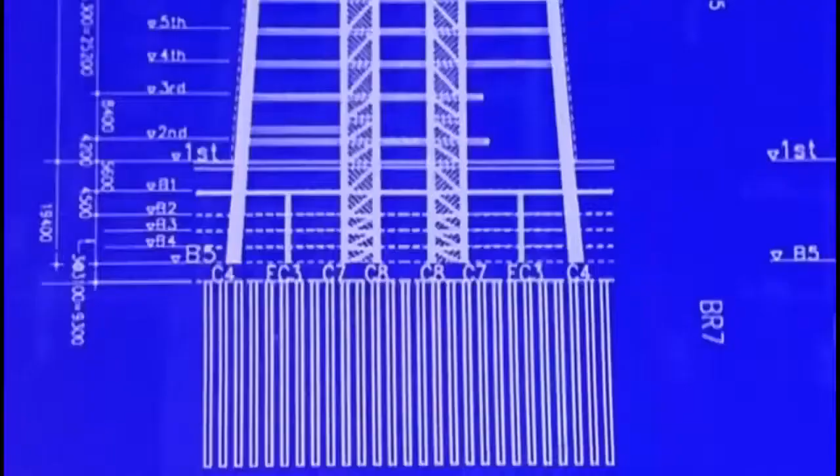Taipei 101, the world's tallest skyscraper. 508 meters of the most high-tech engineering and construction on the planet. Mixing ancient values with cutting-edge technology and taking the heart of Taiwan into the future.

Designing and building the world's tallest skyscraper is no easy task. But here in Taipei, two of the most powerful forces of nature, earthquakes and typhoons, combine to make going super tall a super challenge. I mean, any tall building in the world is a feat of engineering.

Using world-leading engineering and construction techniques, Taipei 101 not so much conquers nature, but outsmarts it. This is the only super tall building in the world that's designed in a seismically active zone. This has never been done before, certainly not to this scale.

The result is a man-made marvel, a unique megastructure of unprecedented size, shape and technology, built to withstand the very worst that nature can dish out. I, for one, I'm a structural engineer. If there's going to be an earthquake in Taipei, I want to be in this building. I'll choose this above all else.

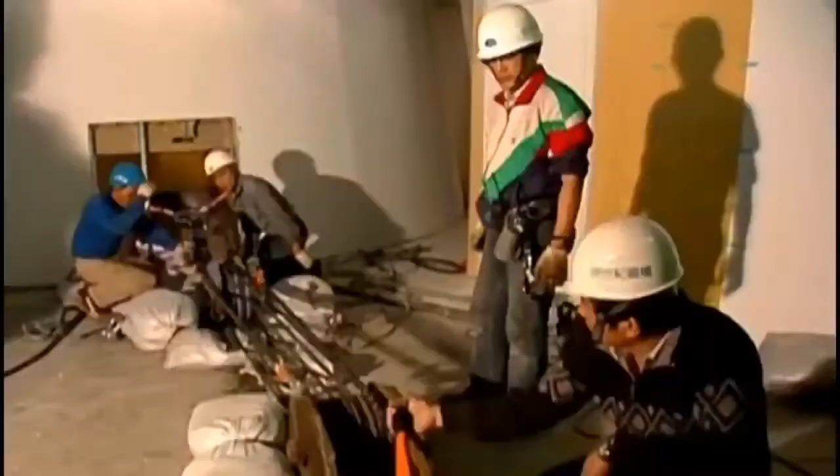For as long as humans have been making buildings, those buildings have been getting taller. From the Empire State Building in 1931, Sears Tower in 1974, Central Plaza Hong Kong in 1992, to the recent Petronas Towers in Kuala Lumpur. Skyscrapers are buildings that go beyond functionality. They are symbols of prosperity and power, icons of wealth and industrial might.

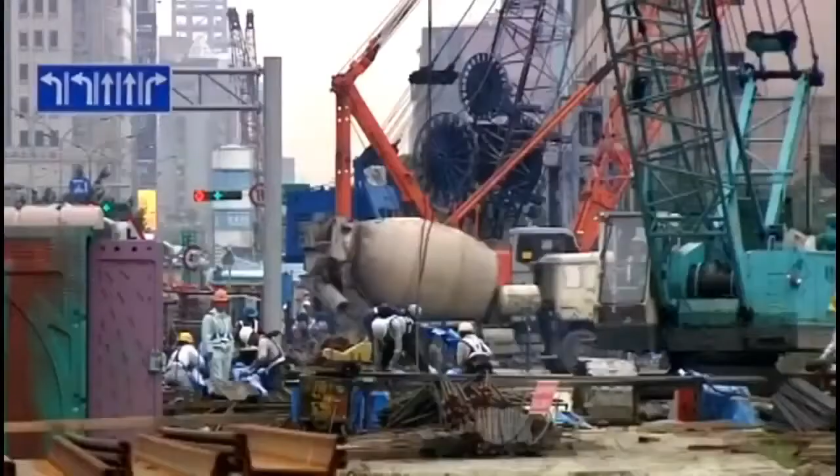If you're looking at the history of skyscrapers, really you begin in America, Chicago and New York are the classic cases. But in the last, let's say, 10, 15 years, Asia's really boomed with regards to the building of large structures. In recent years, Asia has seen an explosion of mega-scale building and industry. The region now holds 8 of the world's 10 tallest buildings. And as modern construction methods and materials continue to improve, designers will continue to aim ever higher. Not because they have to, but because they can.

Developer Harris Lin is one of the most powerful and successful businessmen in all of Taiwan. A member of a major construction dynasty, for him, Taipei 101 is the result of a lifelong ambition. Since I was a boy, I have dreamt that one day I would build a great building, one which will benefit later generations for a very long time. For Harris Lin, Taipei 101 is more than just a building. It's a statement on Taiwan, its people, and its future.

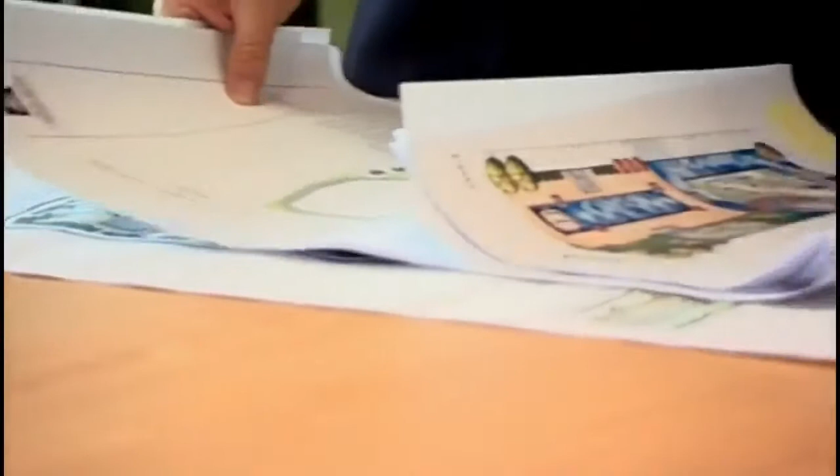A notice to the rest of the world that Taiwan has the technology, the industry, and the determination not just to join the giants of global industry, but to lead them. There's no better way, really, of getting global attention than building these super tall buildings, particularly if it's the highest in the world. Initially earmarked as the centerpiece for the growing and glitzy Xinyi district known as Taipei's Manhattan, the primary goal for the building is to be the best, but not necessarily the tallest.

Long-standing friend of Harris, architect C.P. Wang from C.Y. Lee & Partners, comes into the project in the early stages. We started with 3 buildings, a 60-story building in the center and 2 smaller buildings that are about 20 stories for the different shareholders. But plans quickly evolve as key investors clamor to have the building push up, not out. The planned 60 stories soon turns into 88. And with the mantle of the world's tallest a mere 13 floors away, the momentum becomes unstoppable.

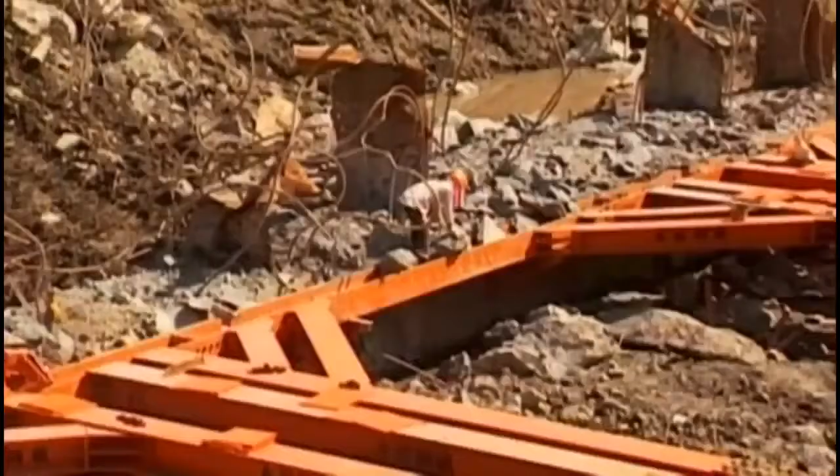We truly believed we could do it. That if we worked hard, we could make a building that was visible to the entire world. But three factors combine to make this project not only the tallest and most visible in the world, but also one of the most difficult to build. Taipei City is an inhospitable place to build a skyscraper. Beneath the earth, a thick layer of soft clay demands uniquely designed foundations. While above ground, the threat of earthquakes and typhoons requires a level of engineering and construction never before achieved.

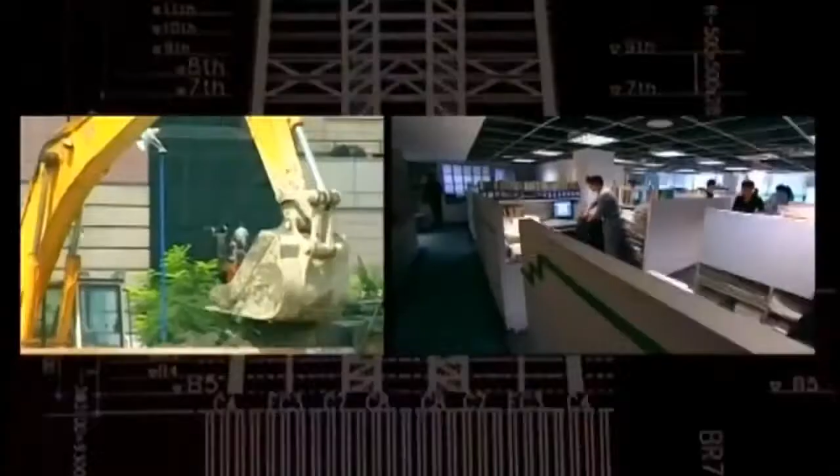If Harris Lin wants to make the tallest building in the world here, his engineers and builders will have to confront the power of the earth. Designing a structure flexible enough to resist an earthquake, but stiff enough to resist a typhoon. Contradictory requirements that until now have never been combined. All these different mixtures of elements have to be blended almost superbly in order to make the building achievable.

The solution will combine two revolutionary systems. First, a braced megaframe joined to 8 super columns filled with a mixture of steel and concrete. And a tuned mass damper, a giant pendulum, the weight of 10,000 people, designed to oppose the effect of wind. The combination of these two concepts is groundbreaking. I am very proud of it, and as architect, you don't get a lot of opportunity to work on something of this magnitude.

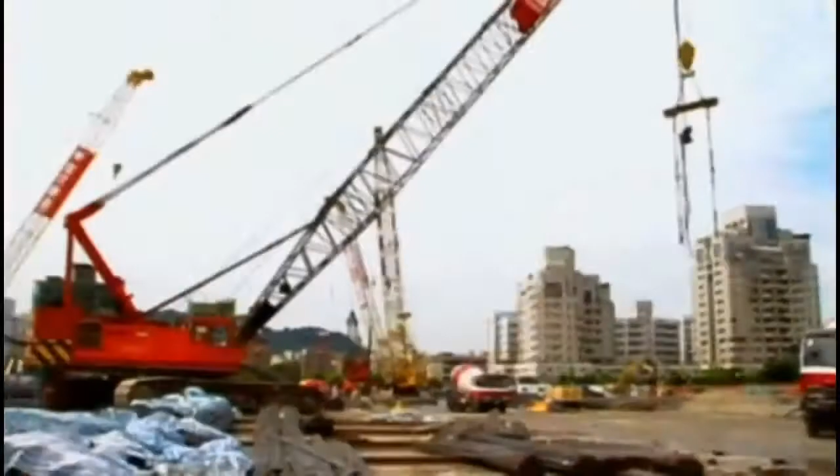Construction will take 6 years, 2,000 workers at any one time, and 700,000 tons of the most advanced steel and concrete ever made. These cost more than the national GDP of some countries. Yet despite all the investment, ingenuity, and determination of humankind, the forces of nature can strike at any time, whether you're ready or not.

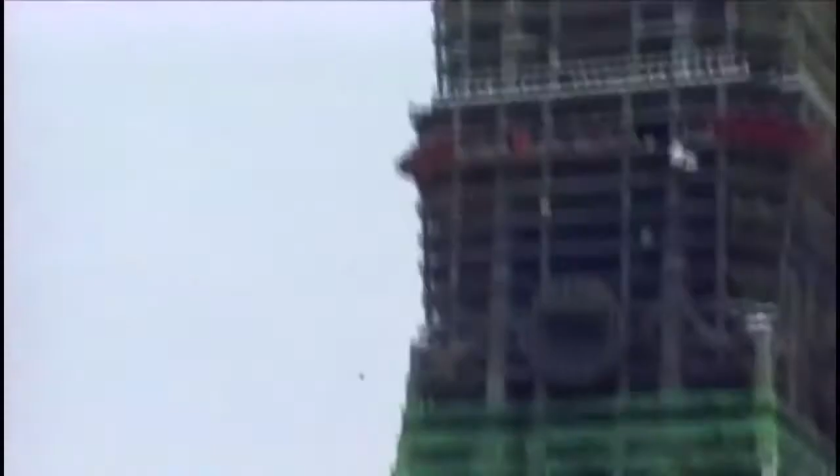Taipei 101 will be built to withstand earthquakes and typhoons, but it also needs to withstand the test of time. To be a true landmark, it must look unique. Its appearance mixes traditional Chinese icons: bamboo for strength and resilience, a pagoda for serenity, the perfect form of an open flower, and the luck and prosperity associated with the number 8.

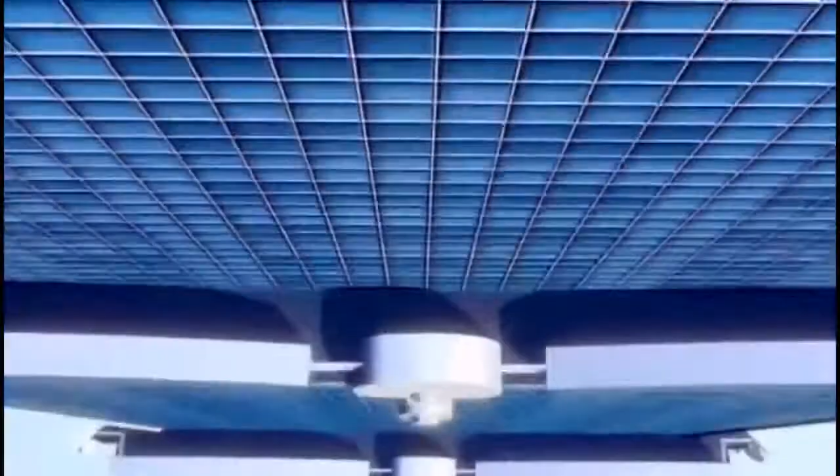We tried very hard to do something that we hope can represent the city, the island, as well as our culture. The result is this: 508 meters tall, 101 floors from ground level. A building that looks completely unique, but soon proves challenging to build. Every major skyscraper in the world is a trade-off between what will look good and what will stand up. For a tall building this height, you cannot escape the practical matters. It has to work.

Taipei 101 will be the tallest skyscraper on Earth. And the forces on a building of this scale are truly immense. Gravity forces it down, while wind pushes it sideways. Existence is a tenuous balance between being strong enough to stay up, but not so heavy as to cause collapse. Most skyscrapers have exterior walls that are either straight up and down or sloping in. But Taipei 101's unique shape sees much of its exterior surface sloping out.

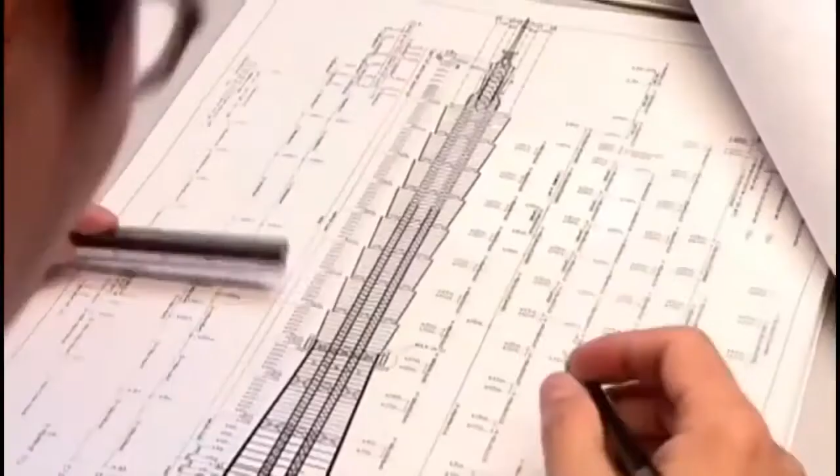Here at Evergreen Consulting, engineer Shaw Shi oversees plans that will translate Taipei 101's unique exterior into one of the strongest, lightest, and most resilient interiors ever made. The shape of Taipei 101 is more complicated than regular tall buildings, because simple and straight lines will be easier to work with.

Aesthetically, Taipei 101 is broken into sections resembling a stem of bamboo. But similarities with this fast-growing superplant don't end here. Just like bamboo, the distinct structural sections of 101 strengthen and support the whole building. Each section operates as an independent unit, transferring the building's massive weight away from the outside of the building and into the middle. The result is a stronger, lighter, and more flexible tower.

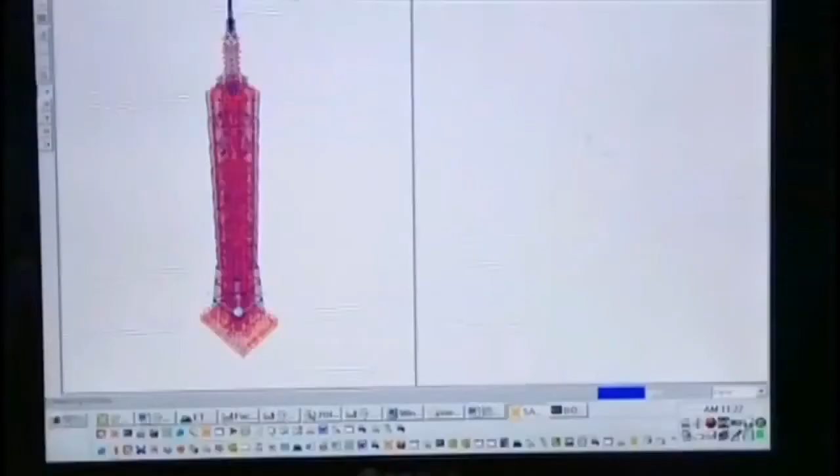For CP Wang, this sort of lateral problem solving has been integral to the success of the project. Their aim is not just to be the highest, but to be their innovative best. Let me put it this way, it's not like the Wright brothers when they invented the airplane. Today a lot of people know how to build an airplane, but it's how good it is that matters. The design of Taipei 101 requires unique engineering to facilitate a unique shape. But the next challenge facing designers pushes this engineering to the limit.

How to make the tallest building in the world stand up against two of the mightiest forces of nature in one of the most hazard-prone cities on Earth. Every year, the people and buildings of Taipei are under attack from two of nature's most primal and unstoppable phenomena. When you put a tall building on an old secondary earthquake fault line, which runs nearby here, and in a place where you get significant typhoons, that just has major challenges.

The problem is that to resist wind, a building must be stiff. But to survive an earthquake, it must be flexible. Taipei 101 will have to be both. This is the only super tall building in the world that's designed in a seismically active zone. This is really pushing engineering and construction boundaries right to the limit.

The island of Taiwan sits at the junction of two tectonic plates, where vast plates of the Earth's crust grind together, causing earthquakes. The entire island is unstable. Three smaller faults run directly under Taipei itself, causing hundreds of earthquakes every year.

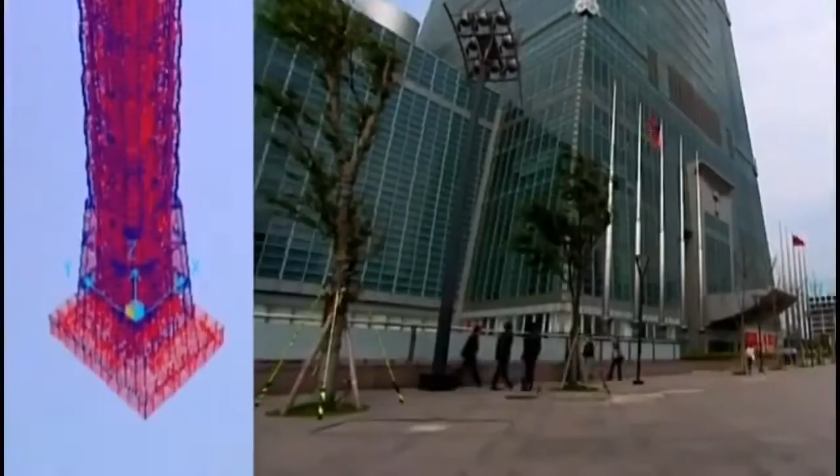The effect of an earthquake on a giant skyscraper can be catastrophic. The entire building is shaken to its foundation as intense waves of energy from the Earth are transferred to every inch of the building structure. To withstand these shocks, the building needs to be flexible so it can move with a quake and not against it. If it's too stiff or brittle, it can break.

Superficial damage like broken windows or walls can be repaired. But any damage to the internal steel framework of a building can be a disaster. As the tallest building in the world, Taipei 101 must be engineered to withstand major earthquakes. But just how major is something of a mystery.

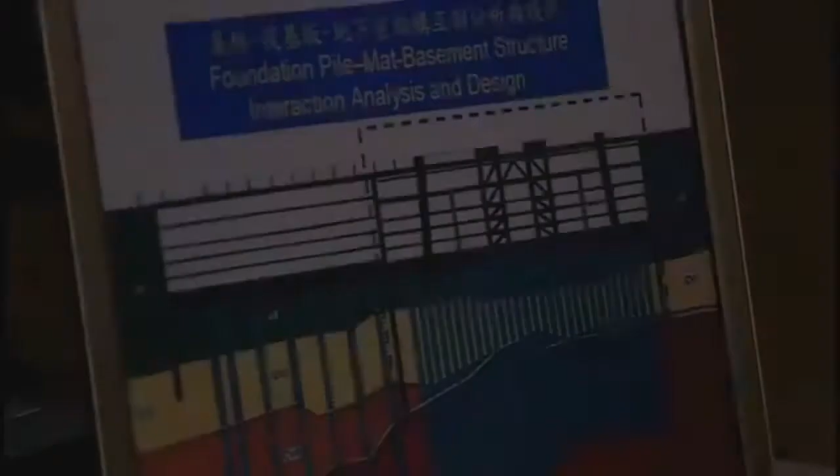Geologist Dunstan Chen is one of the scientists charged with finding out the details. This is when we make the first design, okay? We have to consider this fault. We know there's a fault somewhere here, but we don't know exactly where it is. An investigation is launched involving some of Taiwan's leading geologists to find out where the fault is and how far it is from the Taipei 101 site. They need to establish if it's active and how they should deal with it.

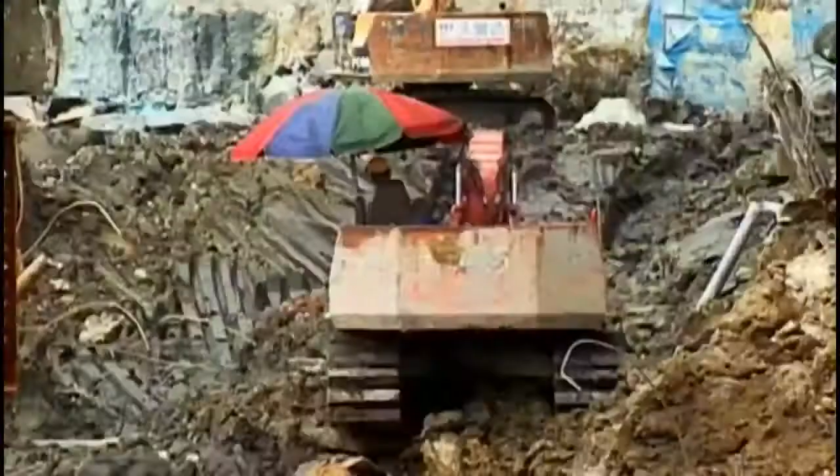The results shock everyone. Then we drill number 4. Okay, we encountered the fault. And this fault, actually, the gouge was around 10 meters thick. It's a huge one. In most earthquakes, the closer the building is to a fault, the worse the impact. The fault found by Dunstan and his colleagues is not only huge, it's close. Only 200 meters away from the 101 construction site. 101 must be prepared to face the most extreme earthquake shocks imaginable.

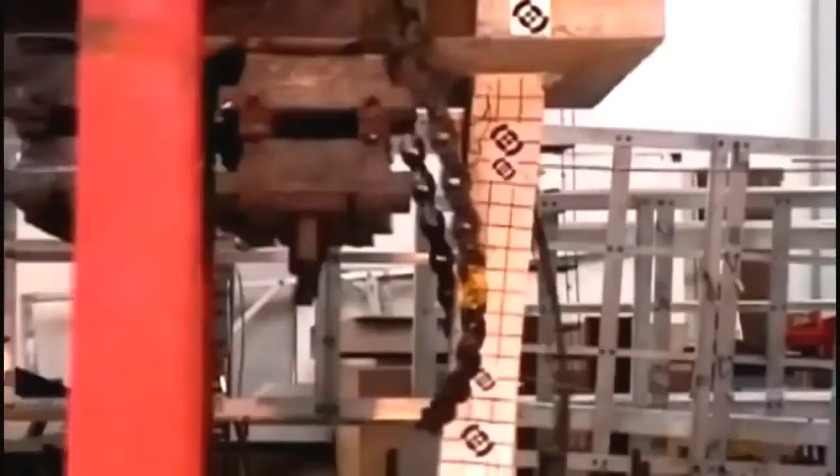Here at the NCREE facility, scientists use a multi-dimensional shake table to simulate a variety of different earthquake scenarios. Scale models of different structural configurations are tested, and the information gained helps to design buildings that are better able to withstand the devastating impact of earthquakes. An earthquake shock delivers brutal vertical, horizontal, and twisting strain on a building. Every joint of every structural element is strained, and if there is one weak link, the whole lot can go.

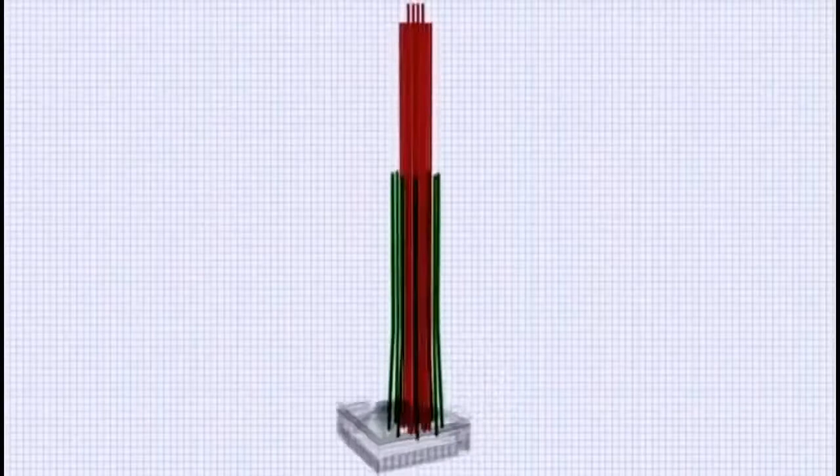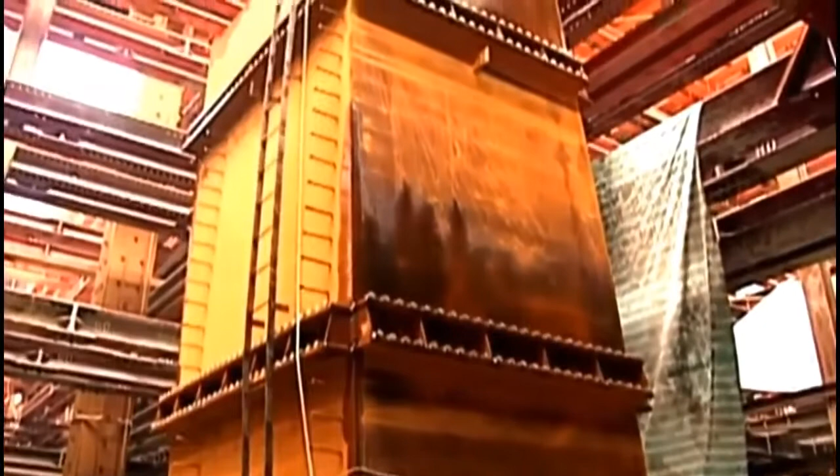To keep 101 standing in a major earthquake, engineers develop a complex internal megastructure. The central core of the building is connected to 8 incredibly strong supercolumns by a network of horizontal outrigger trusses. The supercolumns act like a giant flexible spine, enabling the building to flex and move if it needs to, but not break. Although the idea of supercolumns has been used in other buildings before, the size of 101 takes this engineering to an entirely new level. But the threat of earthquakes isn't the only natural force that builders of Taipei 101 have to worry about.

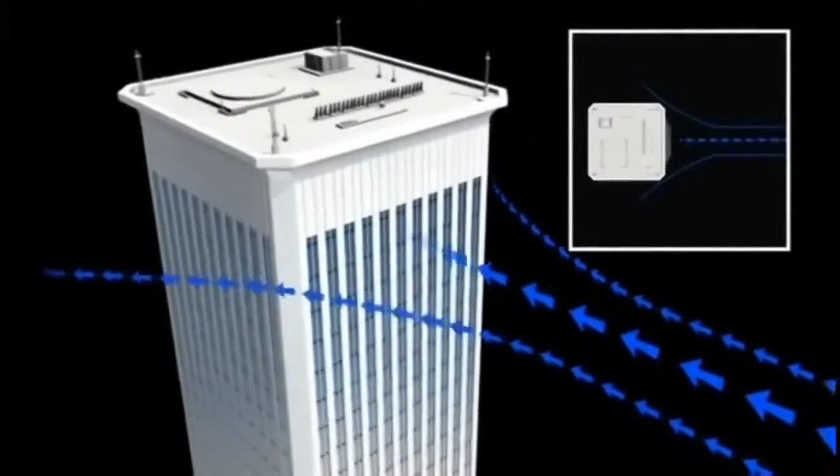Every summer, unstable equatorial air off the coast of Taiwan generates vicious typhoons that lash Taipei. These intense tropical storms, with winds of up to 200 kilometers per hour, can literally blow a building to pieces. But it's not just strong winds that designers of 101 have to worry about. The surface area of a skyscraper is so huge that even a small breeze can still have a major effect. As wind hits a building, it impacts in 2 ways. First, the exposed face of a building can be pushed by the wind like a giant invisible hand.

But under certain conditions, the wind can generate pulsing vortexes on opposing sides of the structure. The vortexes begin to oscillate, exerting small but consistent pushes on alternating sides of the building, eventually causing it to sway. Like a child pumping their legs on a swing, each gust of wind adds energy. This swaying can be so severe that occupants of high-rise buildings can experience motion sickness. Normally, engineers can accommodate this problem by making the internal structure of a building stiff and rigid. But being stiff is exactly what designers don't want in the event of an earthquake. Can engineers of 101 design a building that is both stiff and flexible at the same time? For the project to go ahead, they have to.

Taipei 101 is so massive that finding ways to minimize the effects of wind is a vital element of its design. Engineers and scientists begin with the building's exterior. They find that by using re-entering or saw-toothed corners, the flow of wind around the building is drastically reduced. From the results of wind tunnel testing, the re-entering corners help to reduce the dynamic wind response by 30 to 40%.

Saw-toothed corners on a building hinder the formation and impact of the small wind vortexes that can cause it to sway. But just like the pumping of a child's legs on a swing, where each push adds energy to the last, even when the effect of wind on a skyscraper is reduced, energy will continue to gather unless it's removed. It's not the size of the push that matters, it's the repetition. If engineers can find a way of canceling this accumulation of energy, then the building's contradictory requirements of strength and flexibility will finally be met.

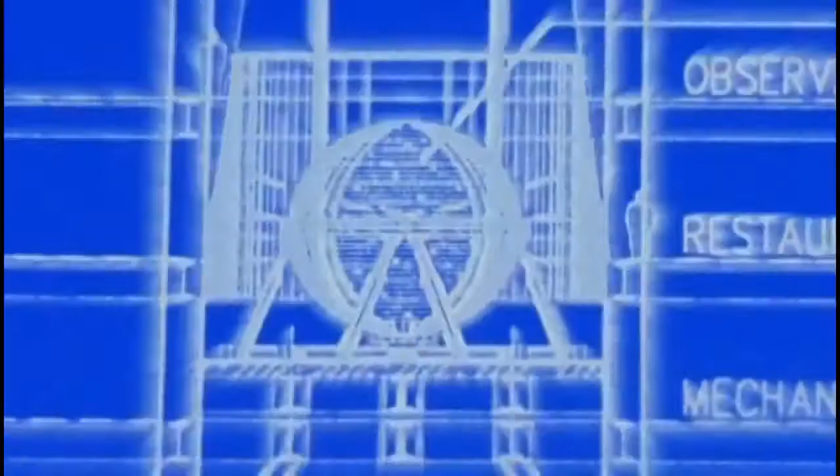Usually, a lot of tall buildings use so-called computer-controlled mass to do that function. In our case, I think our very smart engineers came up with this passive tuned mass damper. The passive damper on 101 uses a huge weight hanging from an upper floor to counter the effect of wind. As Taipei 101 sways in one direction, the tuned mass damper swings in the other, cancelling the buildup of energy and reducing the building's motion.

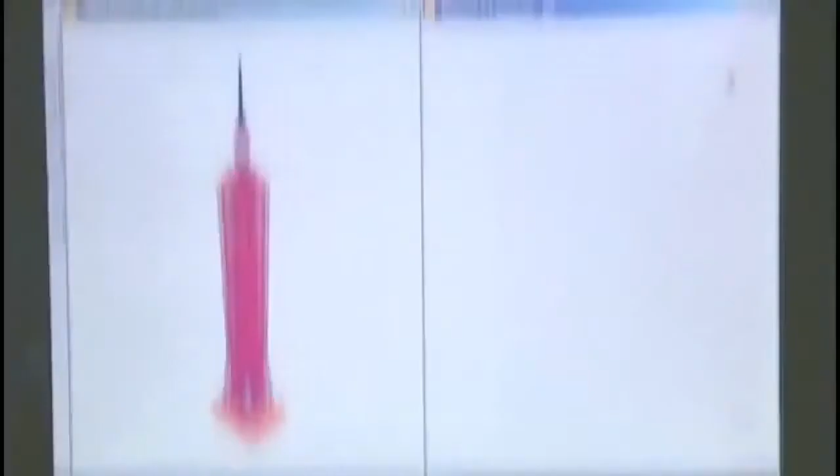Engineers of Taipei 101 have made the impossible possible, designing a building that is stiff enough to survive a typhoon, yet flexible enough to survive an earthquake. But although these ideas seem to work on paper, they are yet to be proven in practice. 101 is going to need a lot more than just new design to combat nature. It's going to need entirely new materials and construction methods as well.

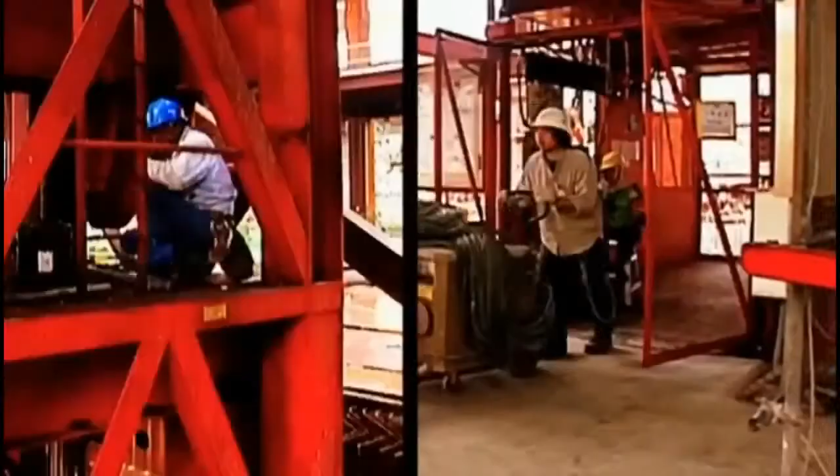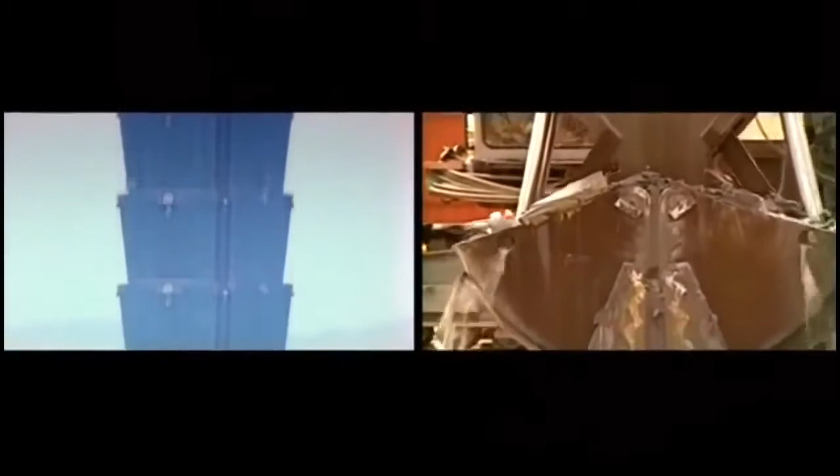Taipei 101's unique megastructure and wind damper will make the building resist the impact of earthquakes and violent storms. But all of this engineering means nothing unless the giant building has a solid foundation on which to sit. Finding solid ground in Taipei is a lot harder than it sounds. Over hundreds of thousands of years, changing sea levels have filled the Taipei Basin with layers of soft, unstable silt and clay. In order for the tallest building in the world to remain standing, its foundations must penetrate through this layer, sometimes 60 meters thick, to find the solid bedrock below.

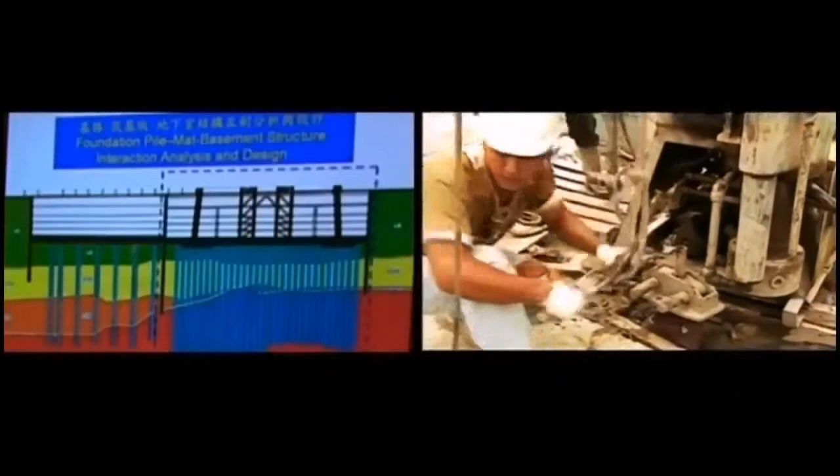Geotechnical engineers spend 8 months collecting core samples to analyze the soil on the building site. They find 3 distinct layers of soft sediment before finally reaching solid ground. This information helps designers to develop detailed plans for 101's foundation structure. Preparing the foundations takes 15 months and removes 700,000 tons of earth from the site.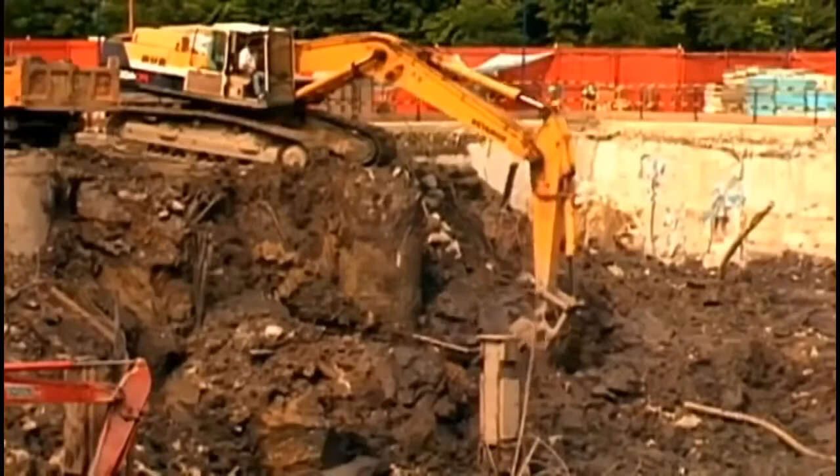The foundation of a skyscraper is one of its most vital structural elements. It must distribute the building's enormous weight evenly below ground, at the same time creating a super strong base for the towering megastructure above. That's the key point for the whole building, that the building can stand up into the sky. To compensate for the inherently unstable ground of Taipei, 101's foundation is designed to literally pin the building to the deep layer of bedrock below.

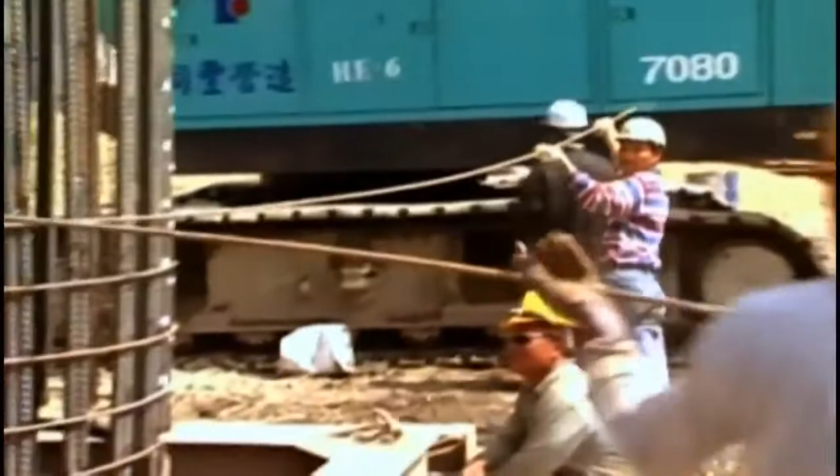A 23,000 cubic meter concrete slab sits on top of a complex system of 380 reinforced concrete piles. These piles transfer the building's weight and structure deep into the bedrock, meaning 101 is more than just resting on the earth. It's fused to it. This unique foundation, combined with 101's mega frame and damper, give the building an extraordinary earthquake safety rating that exceeds even that of Taiwan's nuclear power plants.

Inside the 101, during an earthquake, you watch out for the falling particles, okay? Rather than worry about the falling of the building. Taipei 101 will not just be one of the strongest and most stable buildings in Taiwan, but one of the strongest and most stable buildings in the world.

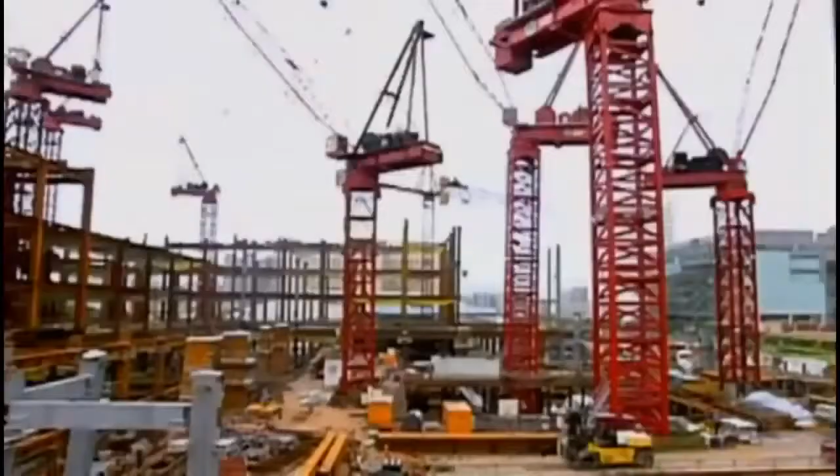Building on the main megastructure begins in September 1999. If I look back, I feel it was more difficult than I expected. But I didn't feel that way when I was working and solving the problems every day. This isn't a construction workforce, it's a construction army.

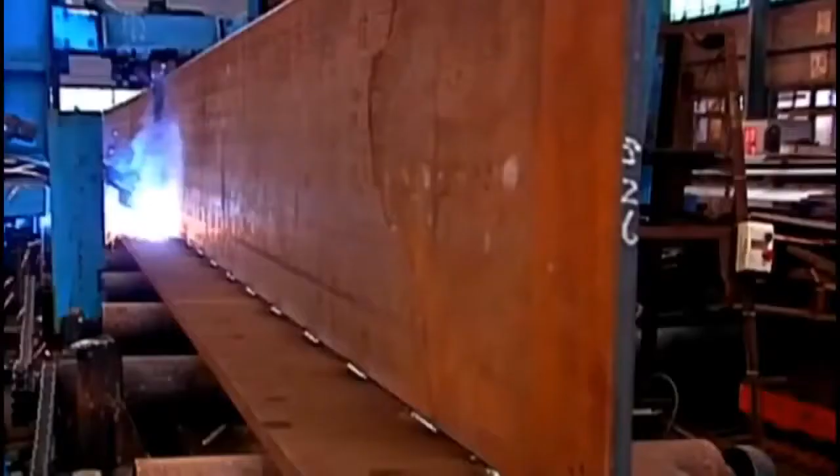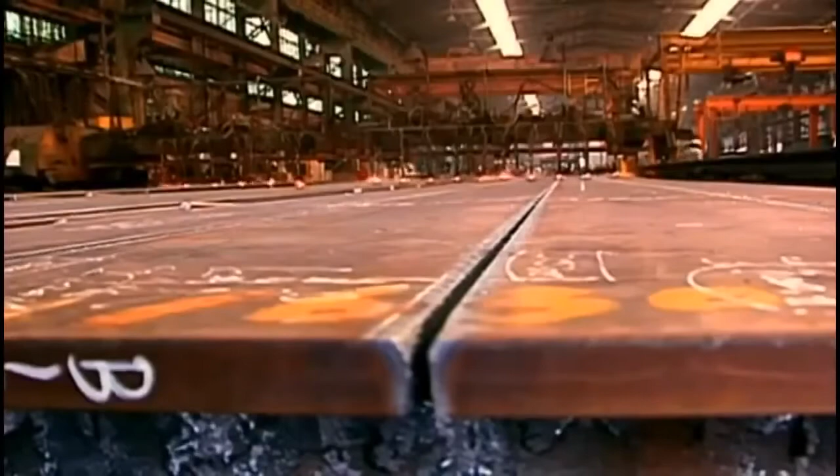Here at the Kaohsiung China Steel Plant, some of the most high-tech steel manufacturing techniques in the world are being used to build the various elements of 101's groundbreaking megastructure. The basic idea of this building is so-called double tube structures, which means we use the steel frame to create the outside tube, and then we use the steel frame and the concrete columns to create inner tubes.

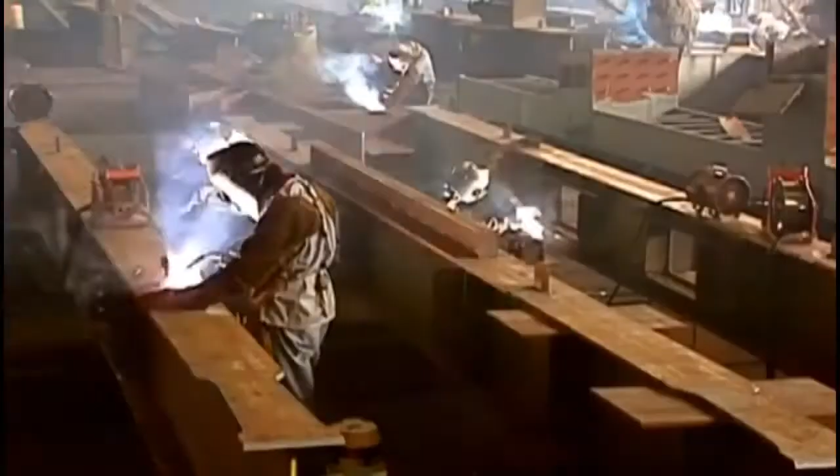The steel used in Taipei 101 needs to be soft enough to weld, hard enough to carry the building's awesome bulk, and pliable or bendy enough not to weaken or break if it's rattled by an earthquake. Each of these requirements demands a different type of steel, a complex chemical cocktail of carbon, alloy, and refined iron. More carbon makes it stronger, but too much and it becomes stiff, brittle, and hard to weld.

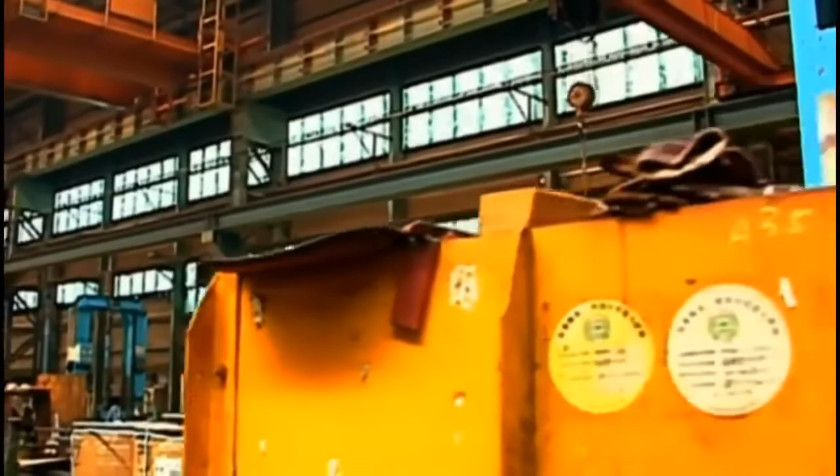The Kaohsiung plant develops 5 different kinds of steel for 101, each with a specific flex-to-strength ratio designed to suit its purpose and position in the building. The challenge for manufacturers is to make perfect steel into perfect components for 101 each time, every time, day after day. Starting with the raw materials, massive blast furnaces push out 10,000 kilogram ingots of refined steel.

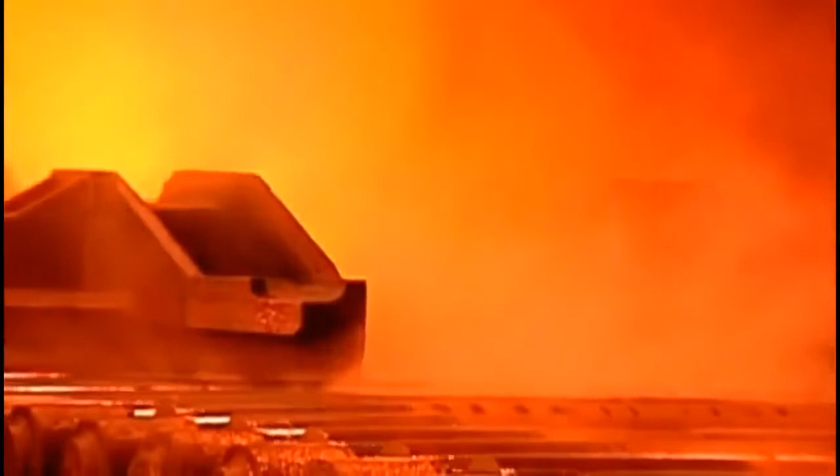The ingots are near liquid hot, 1200 degrees Celsius. An elaborate system of hot rollers and purification baths torture and squeeze the giant blocks into 90mm thick flat plates. Precision, control, and consistency are crucial. Any imperfections mean weakness, and any weaknesses could be fatal for the mighty 101 megastructure.

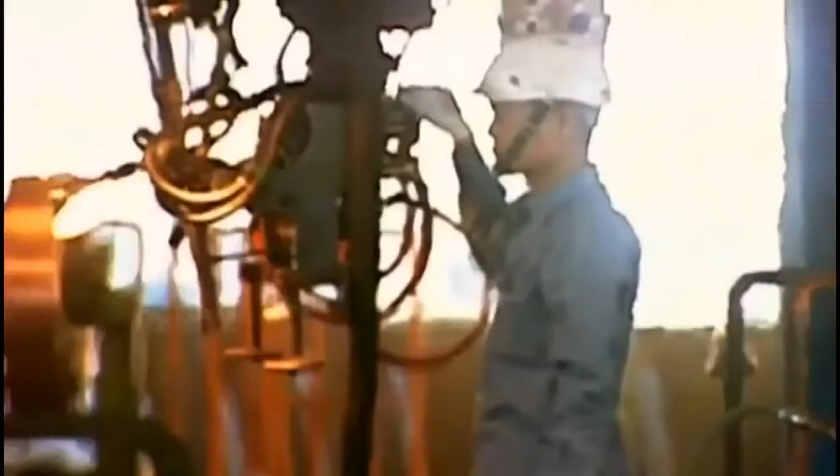Patterns, ID numbers, and cutting are all controlled by computer. This plant uses more electricity every day than a small city. From start to finish, each super column box section takes 4 months to make. The final product is big enough to park a car in, weighs as much as 90 tons, and is as tall as a 2-story building.

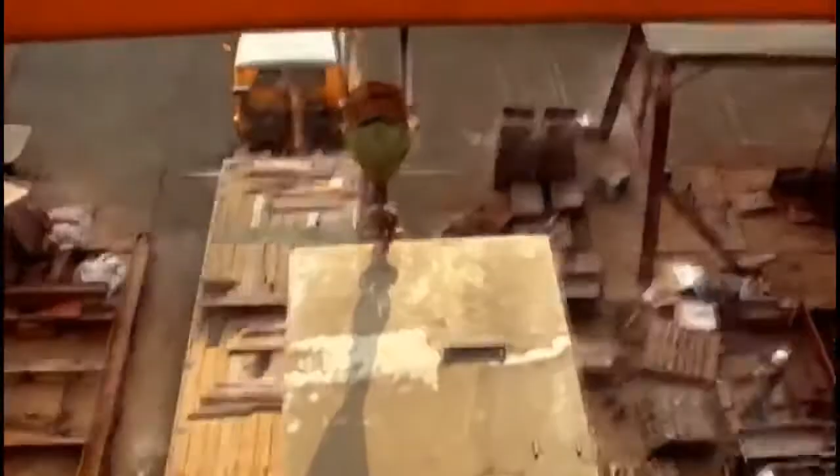Each of 101's super columns will need more than 50 of these box sections. That's more than 400 for the entire building. The next challenge facing builders will be to put them together. The integrity of 101's megastructure requires the super columns to act as single units. But joining 50 90-ton box sections into one seamless unit has never been done before.

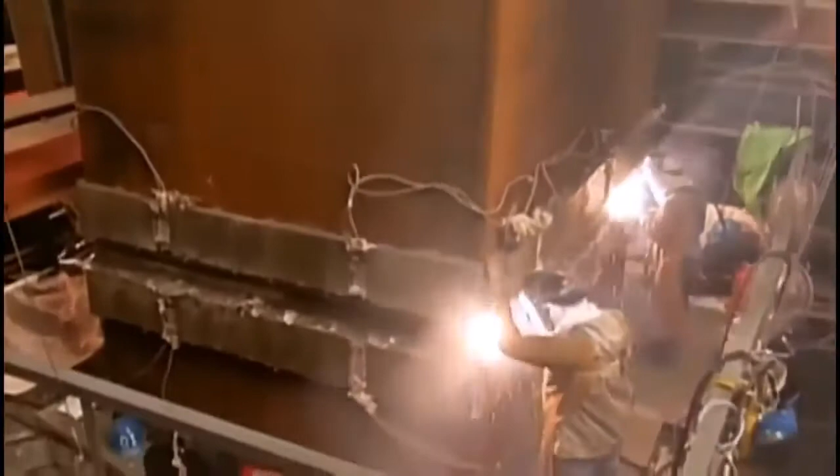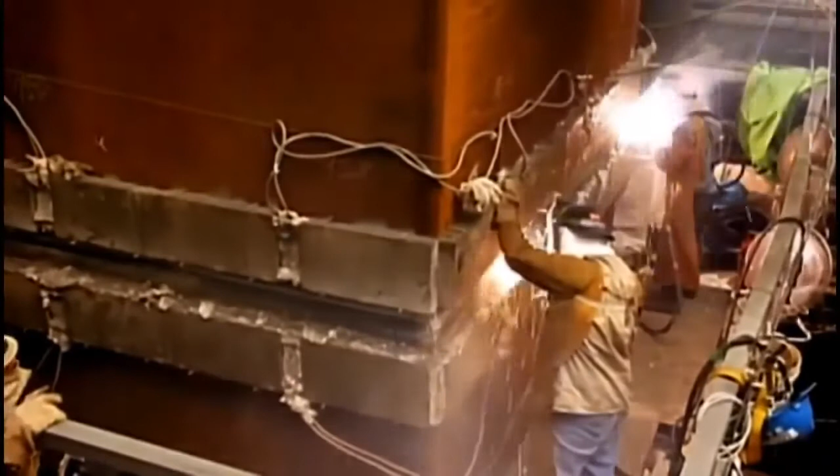Yet again, 101 will tread new ground. Ordinary welding techniques simply won't cope with the enormity and detail of the task. Every millimeter of every join requires absolute perfection. Teams of 6 welders work simultaneously. The entire girth of each join has to be heated for the welds to bind.

The scale of the task is mind-blowing. Each join takes at least 14 hours to complete. That's nearly 2 years welding in the super columns alone. The high-strength steel and advanced welding techniques used in 101's super columns give the building a strong and flexible backbone built to withstand the shock waves of a severe earthquake.

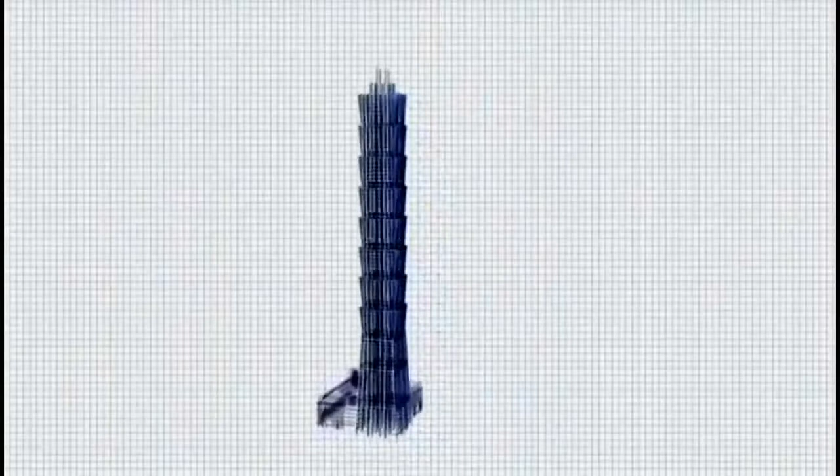But dealing with the building's incredible weight demands an entirely different type of strength, one that steel alone cannot provide. A building usually has 2 types of force, the tension force and the compression. And we all know steel works better for tension, and the concrete works better for compression. The awesome weight or compression loading on the world's tallest structure would crush the super columns if they were hollow.

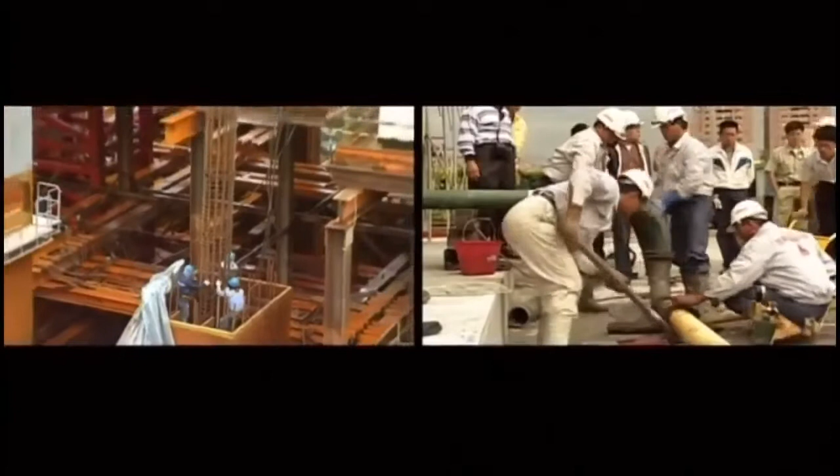But filling them with concrete to the 62nd floor combines the tensile strength of steel and the awesome compression strength of concrete. Making the system even more robust, engineers develop a concrete mix that is 60% stronger than normal. Concrete able to withstand an awesome 10,000 pounds per square inch of compression. The combined benefit of steel and concrete gives 101 the strongest, lightest, and most flexible backbone of any skyscraper on the planet. A backbone that is about to be put to the ultimate test.

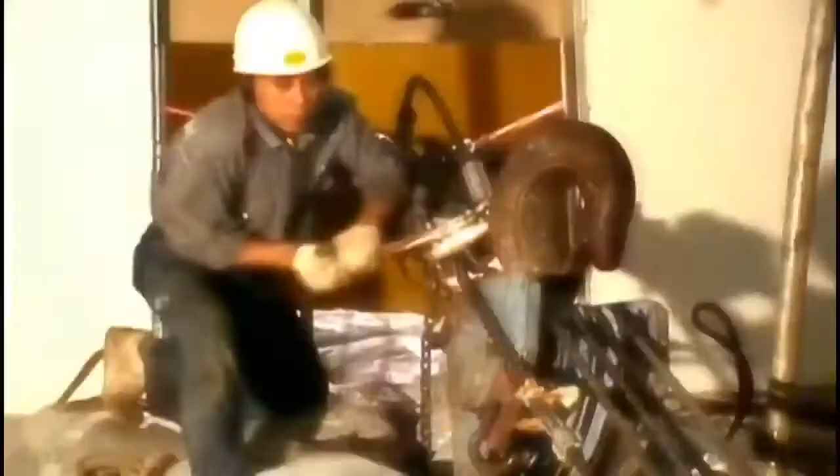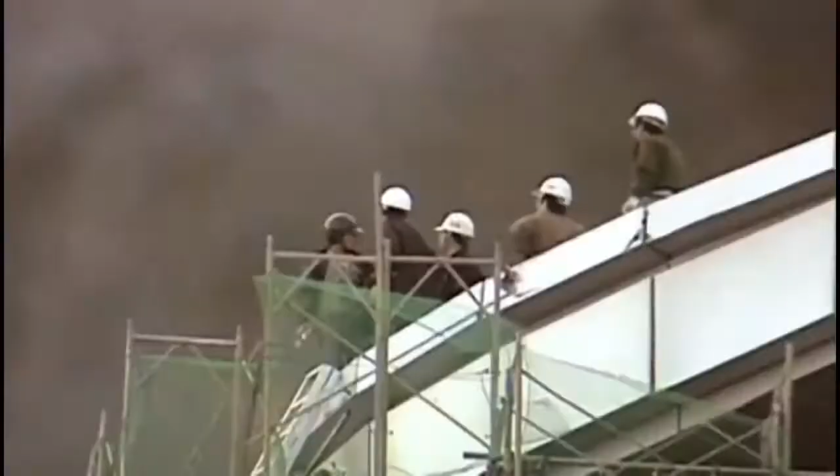2:52 p.m., March 31st, 2002. A magnitude 6.8 earthquake rocks northern Taiwan. The entire island is brought to its knees. And in Taipei, only 135 kilometers from the quake epicenter, over 100 houses are destroyed and at least 5 buildings collapse.

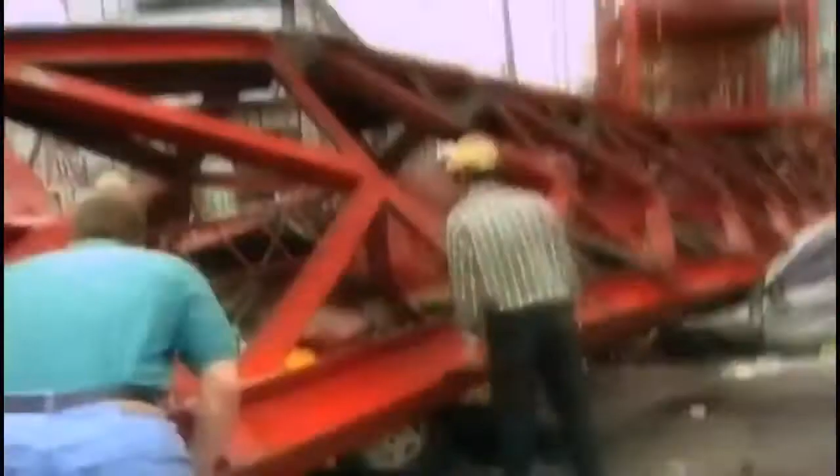The quake wreaks havoc on the construction site of 101. 2 purpose-built cranes topple 240 meters to the ground. 5 workers are killed and dozens more injured. A taxi driver fleeing his vehicle is crushed. Taipei is a disaster zone. All work on the building stops as aftershocks continue to strike. Insurance disputes rage, and engineers and surveyors check the massive building for hidden structural damage.

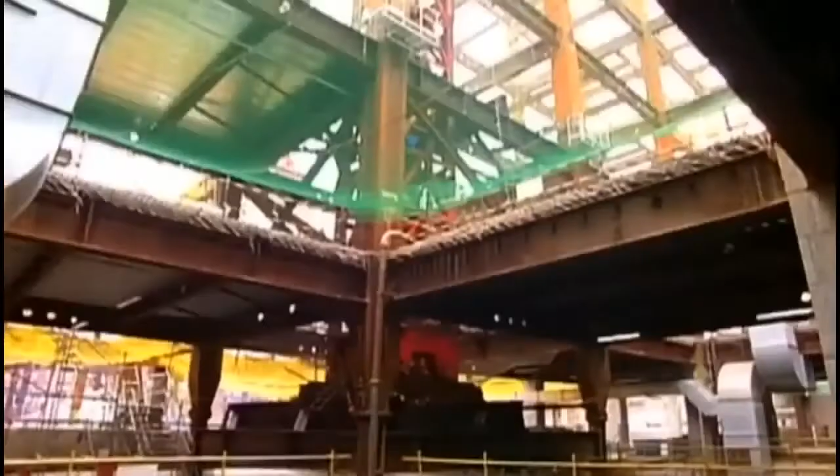It was a big challenge for me at the time. The 9/11 attack had happened in the USA just before. And so our people and our investors began to question whether we needed such a tall building in Taipei. The work ban continues, not just for days or weeks, but for 3 months. An earthquake, the very force 101 has been designed and built to survive, now threatens to destroy the building's future. Not physically, but financially.

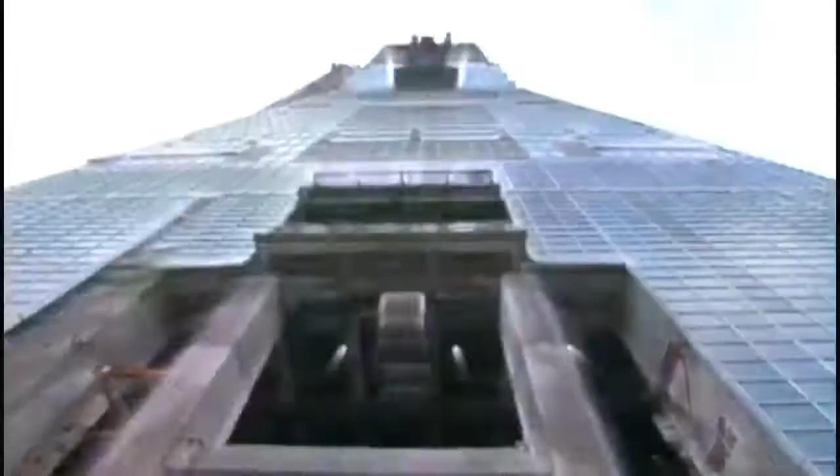Morale plummets, and a dark cloud hangs over the project. Finally, in July 2002, the building surveyors give 101 a clean bill of health. The internal framework is intact, and once more, work can resume. But the victory is bittersweet. No scientific test could have proven so effectively that 101's mega frame can resist a severe earthquake. But no scientific test would have come at so great a cost. The notorious March 2002 earthquake has put 101's mega frame under the most extreme test imaginable.

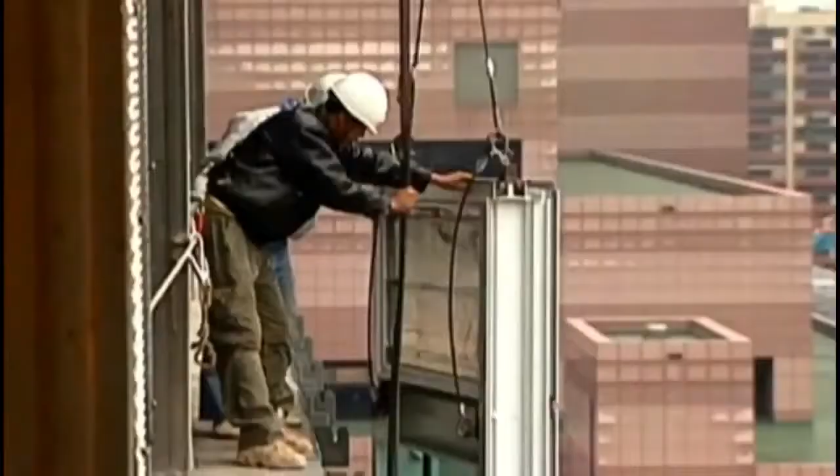But as work resumes and the skyline of Taipei is increasingly dominated by 101, a geologist from a prestigious local university discovers a worrying combination of data. Although only one severe earthquake has struck Taipei since work on 101 began, there has also been an unusually high number of smaller ones. Taipei 101 might not just be the victim of recent quakes, it might be the cause. When the second felt earthquake occurred again, almost in the same location, then I take it very serious to do some research work.

The fact that Taipei is a seismic hotspot and that 101 is built only 200 meters from a dormant fault line is common knowledge. But the powers of the Earth are often hidden. And despite the combined effort of geological scientists the world over, accurately predicting when and where an earthquake will strike is beyond us. Dr. Lin believes the enormous weight of 101 may have reawakened Taipei's dormant fault lines, increasing the threat of earthquakes, not just to the building itself, but to the entire city.

Although Dr. Lin cautiously states that this theory is not yet scientifically proven, the circumstantial evidence seems compelling. Bigger earthquakes, and more often, since the construction of Taipei 101 began. But foundation engineer Dunstan Chen explains why he believes this hypothesis is fatally flawed. That's actually at the beginning.

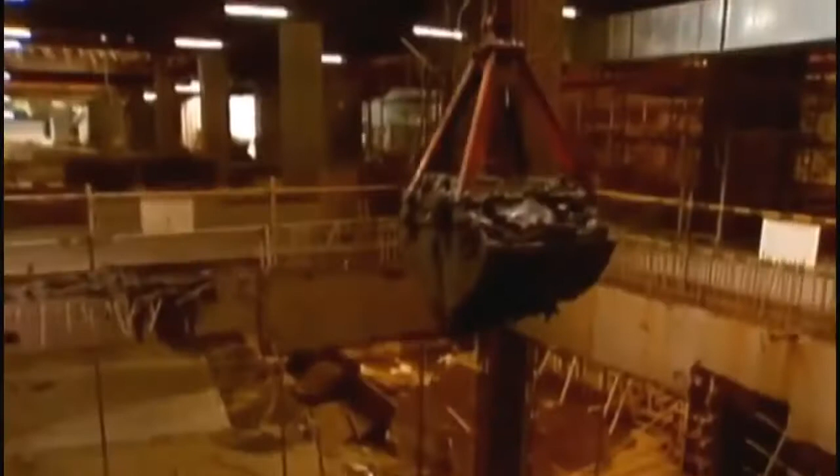For every high-rise building I built in Taiwan, we consider that the weight of the structure, okay, should be more or less equivalent to the soil you excavated. The net change in pressure on the Earth as a result of 101 is nil. 700,000 tons of construction has gone up, but 700,000 tons of earth was dug out to build it. The unpredictability of seismic activity means that either way, we may never know for sure. And regardless of what causes the frequent earthquakes in Taipei, this man-made marvel is being built to withstand them.

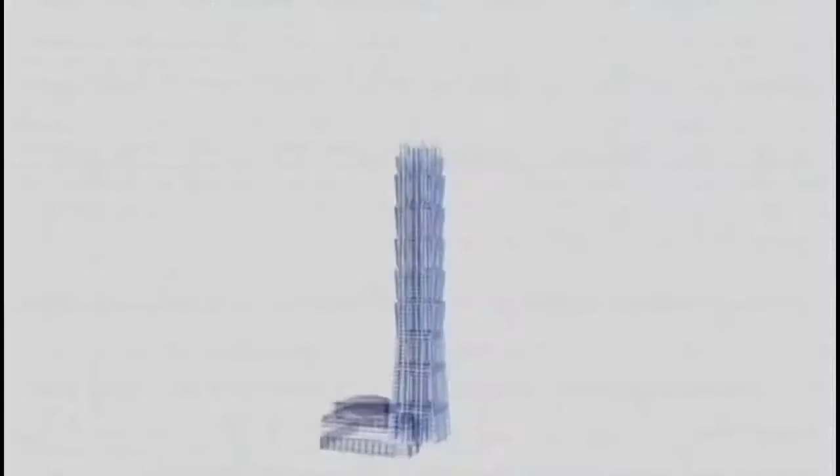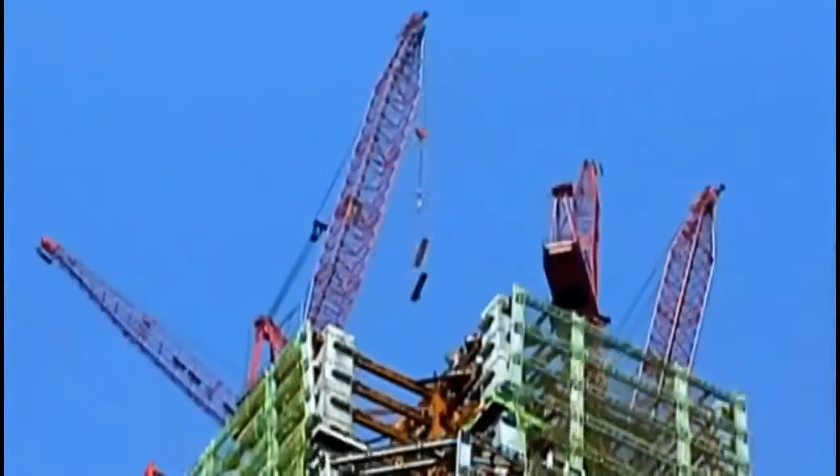On the construction site of any super tall building, the difficulty of getting materials up to the action is one of the greatest logistical challenges. The primary tool for this on 101 is a series of 4 self-erecting construction cranes. The biggest, strongest, and most advanced on the planet, these cranes are able to shift thousands of tons straight up in a single day. But their most ingenious feature, and the one most crucial to the construction of a mega skyscraper, is their ability to self-erect, to grow with the building around them.

To do this, powerful hydraulic rams lift the entire top mechanism of the crane. A new tower section is then placed in the gap, cross members secured, and progress resumes as normal with almost no interruption to workflow.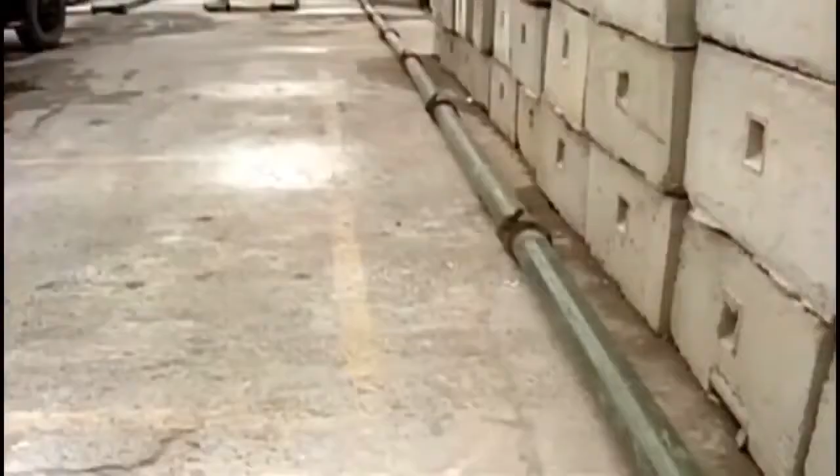Although concrete is one of the oldest and most widely used construction materials, it's incredibly heavy and, like a liquid time bomb, has to be pumped into position before it sets. These two factors pose a major challenge for construction workers on 101. The concrete they use here doesn't just have to get from the plant to the building, it has to get up the building as well. Once you leave the batching plant, within 2 or 3 hours, you have to arrive on site and start pouring.

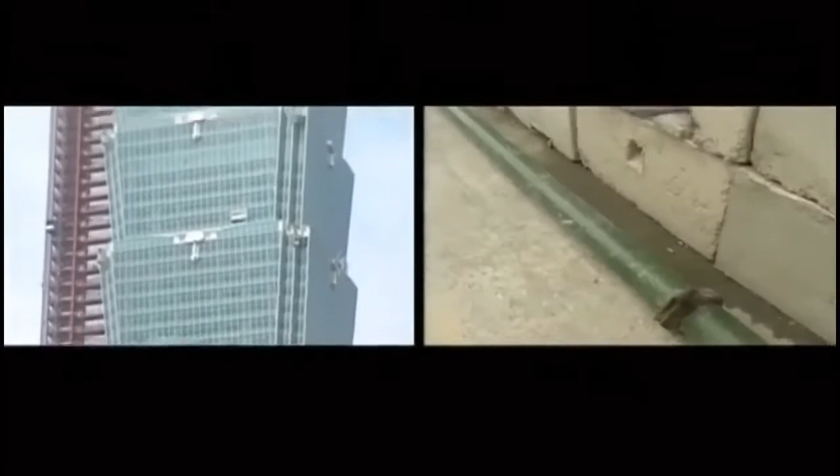To do this, engineers develop concrete with specific levels of viscosity or runniness and specific drying times. This buys them valuable time and helps the powerful concrete pumps to work more efficiently. The result is yet another world record for 101. Concrete is pumped from ground level to 450 meters. That's higher than any other concrete pour in history.

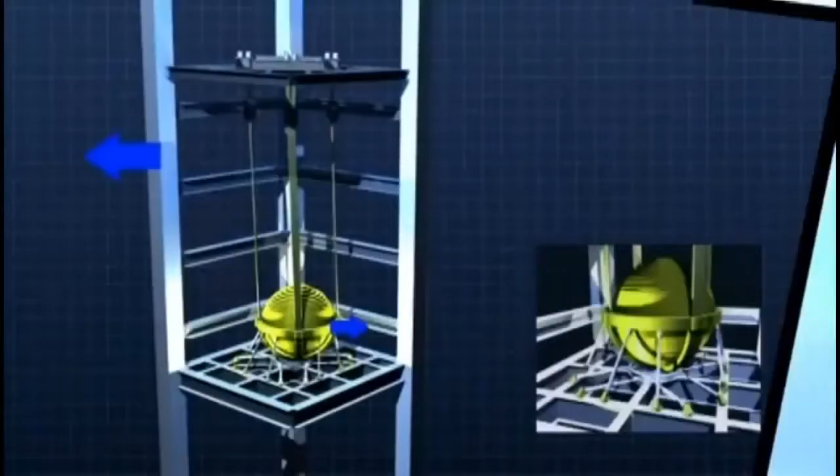Construction reaches the 92nd floor in July 2003. Although nearing completion, the technological crown jewel of 101 is yet to be put in place. The tuned mass damper, the crucial windproofing mechanism designed to counteract the horizontal sway of 101's massive bulk. Although mass dampers have been used in skyscrapers before, they've never been this shape, they've never been this big, and at 380 meters, they've never been this high up. To be effective, the damper needs to be 0.1% of Taipei 101's total mass, a staggering 660 tons.

Not even the awesome Taipei 101 cranes can lift something this huge and heavy. The ball arrives in prefabricated sections, which are then welded together on site. It's then hung from 16 10-centimeter thick cables and tuned to make it swing in exactly the opposite direction to the building. When the building is moved by the wind, it would go against it and balance it out real quickly, very much like the shock absorber of a car. And I think this idea has not been used in any other building that I know. So I think we're the first one to try that.

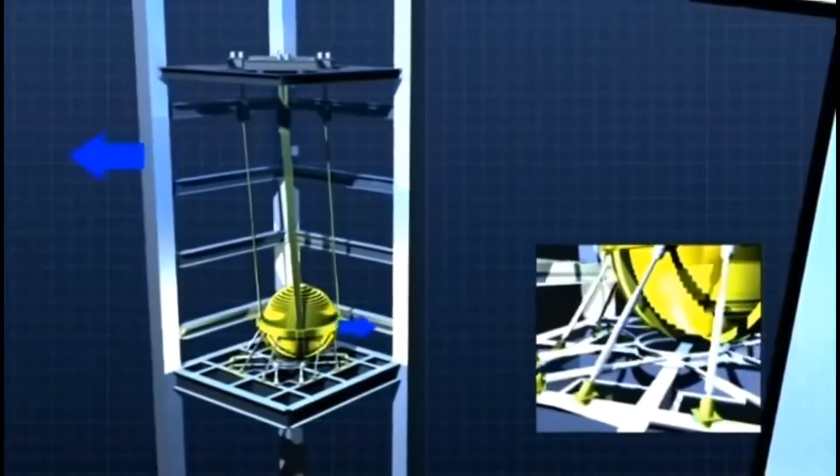In principle, it works like a simple counterbalance. But in reality, things are a little more complicated and a lot more clever. To stop the damper from rocking either excessively or out of sync with the building, the ball is attached to a series of hydraulic dashpots, like mega shock absorbers, that stifle the ball's movement. If the damper experiences a particularly sudden jolt, such as an earthquake, the hydraulic resistance in the dashpots is strong enough to create a lockdown effect, meaning that the big golden ball in the sky will stay exactly where it is.

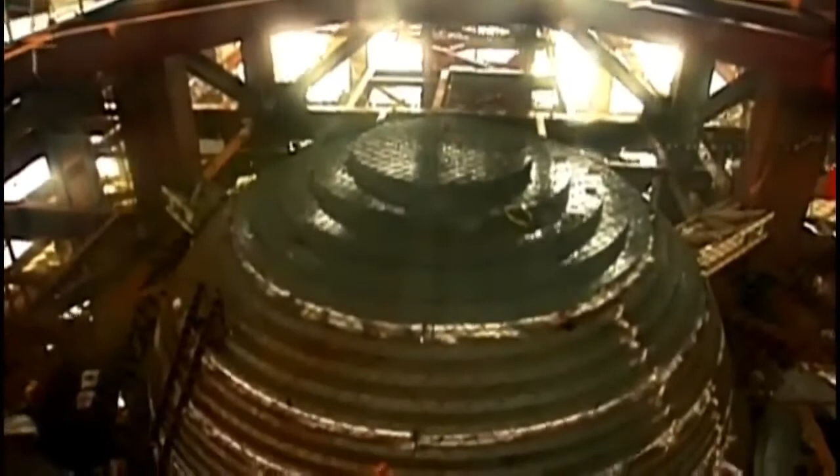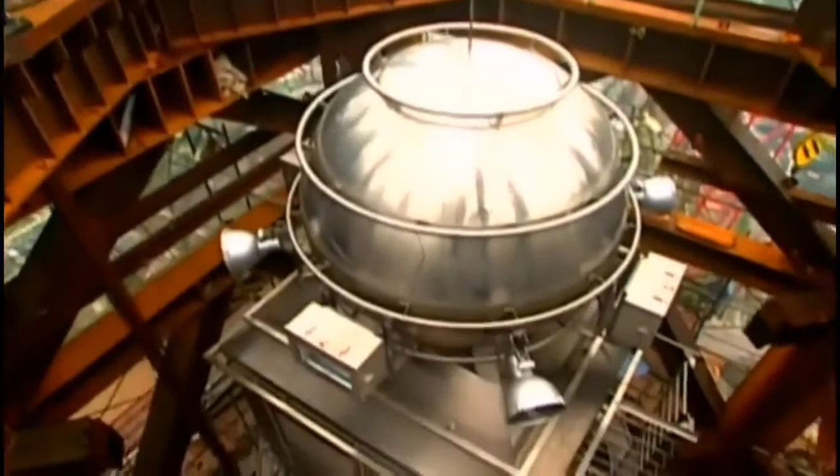If the mass damper is the technological crown jewel of 101, then the 60-meter pinnacle at the very peak of the building is the aesthetic equivalent. By late 2004, all major structural work has been finished on the main body of 101. Although this marks the successful completion of one of the most remarkable construction endeavors ever attempted, 101 is still 4 meters short of being the tallest building in the world.

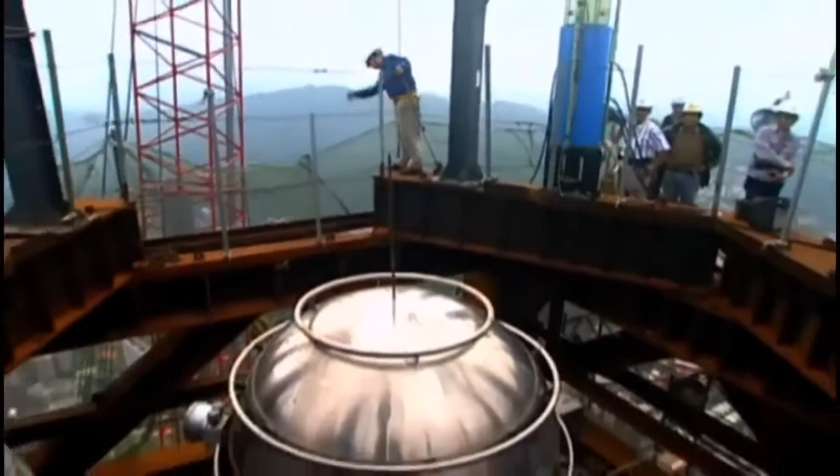Successfully raising the pinnacle will assure them the title, but at 400 tons, it will also be a logistical nightmare. Nothing this heavy has ever been lifted in this way at this height. It's not just difficult, it's dangerous. A system of hydraulic jacks and geared cables lifts the massive structure from its base. Progress is painfully slow, but victory is the only option.

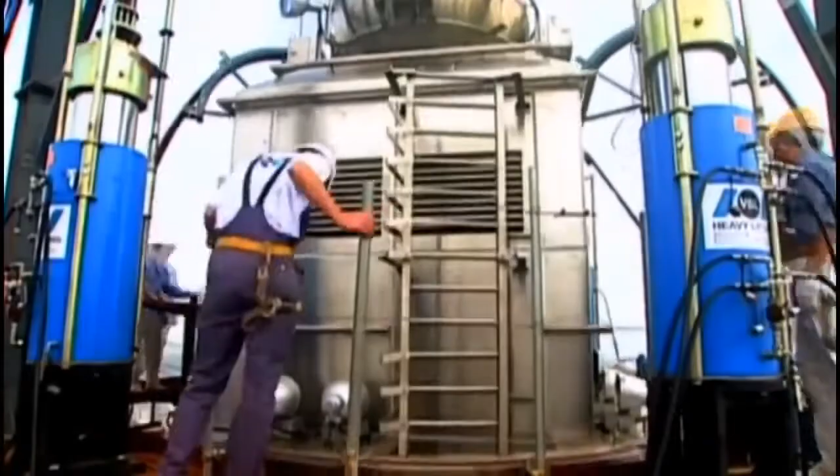Finally, after 14 days, the pinnacle is secured. Against all odds and against nature, the tallest building in the world is complete. Yet although this marks the end of one phase of the building's life, it is the beginning of another.

Today, some of the world's biggest corporations boast offices here. And in peak periods, up to 40,000 people come in and out of the building every day. It's like a city unto itself, only vertical. For a lot of people, until you see it, you don't believe it, nor do you understand it. Many of the everyday functions we take for granted are complicated exponentially by the addition of height, making the operations of this mega skyscraper a mega challenge.

Every minute detail of the building is monitored and accessed in here, the central control room. From the speed of every fan on every air conditioning duct to each of the 96 elevators, Operations Manager Jeff Shu and his staff can see and control it all. The security section monitors the focus, angle and zoom of each of 101's 520 surveillance cameras. The locks on even the most obscure doors are hardwired into the vast central brain of the security system.

In case of fire, the equivalent of 2 Olympic-sized swimming pools of water is stored within the building to fuel the vast array of sprinkler systems. Stairways and corridors leading to the mechanical floor safety zones are pressurized to reduce smoke levels and are equipped with personal emergency kits, closed-circuit TV, and, perhaps most importantly, access to the outside world.

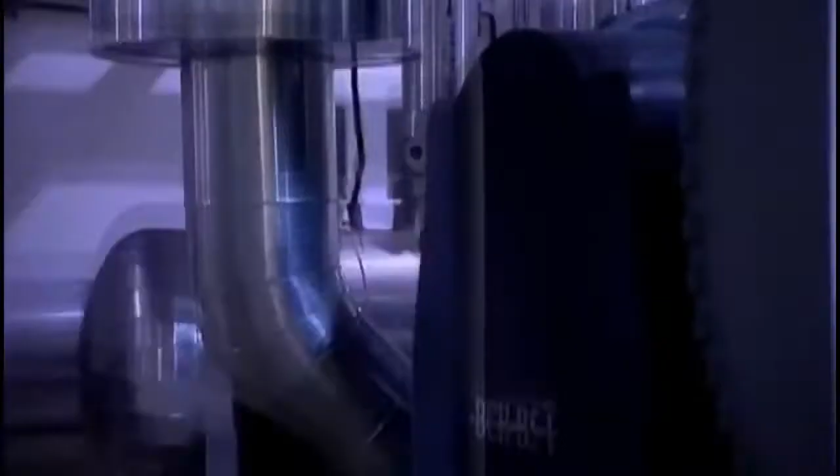On a building of this height, matters as simple as flushing a toilet pose serious challenges. 1 litre of water falling from the top floor of 101 will have the same impact as a house brick travelling at 65 kilometres per hour. Sewerage tanks on every mechanical floor contain, process and transfer grey water safely to the ground.

The elevators are the fastest in the world. Travelling at 60 kilometres per hour, they go from level 5 to level 89 in only 37 seconds. Each carriage is pressurized to avoid ear damage, streamlined to minimize noise, and electronically balanced to ensure a ride so smooth that even a coin won't topple on the incredible journey.

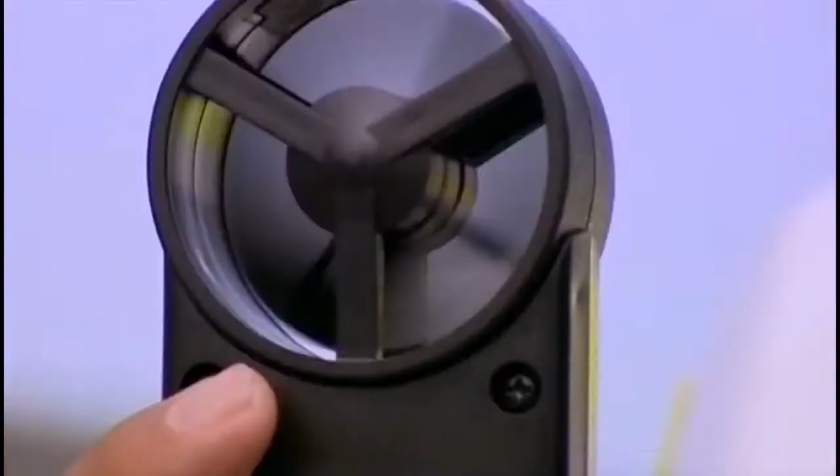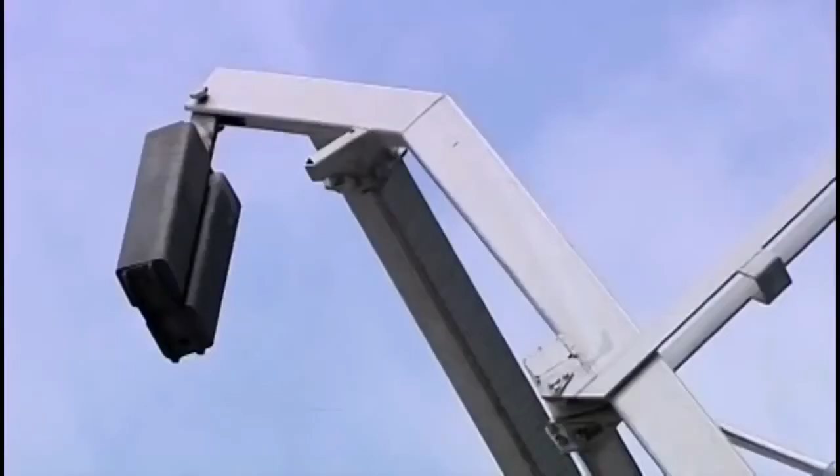To clean each of 101's 17,000 windows, custom-built gondolas dangle workers off the edge of the building. They can only work when the wind is under 10 meters per second, and even then, the cables have to be hooked into the walls to stop the gondola blowing off track. The awkward angle of 101 means that an elaborate counterweight system has to be used so that workers can get close enough to the walls to work. To clean the entire building takes 4 teams of 2 workers 3 months. The job is so big that as soon as it's finished, it's time to start again.

Inside and out, Taipei 101 pushes the boundaries. A unique-looking building that has changed the face of construction, design and engineering forever. The tallest building in the world, in one of the most hazard-prone places on the planet. Defying the powers of earth and wind, to go where no building has gone before. It's really a very, very important building. It is a landmark, a benchmark. Long after its mantle of world's tallest has gone, its achievement will remain. A symbol for the future of a proud island. A skyscraper that took on nature and won.